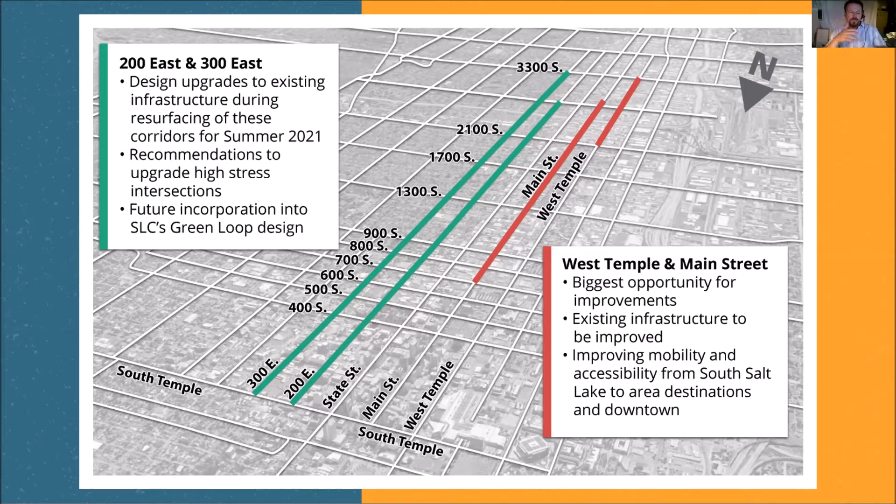That's a lot, but I think that should get us pretty well oriented geographically, and in terms of our focus for tonight, but also some context for the other corridors that are on our radar.

We wanted to start this meeting because we're in an outreach phase, trying to talk with people from the neighborhoods and communities that know these areas best. I've been doing this work a long time, but I don't live and breathe on these corridors every day and see all the nuances. So we're leaning on folks—we have a stakeholder group we've convened, with representatives from community councils, business districts, local businesses, Bees baseball, car dealerships, the SAPA group, and lots of people operating on a daily basis in the area.

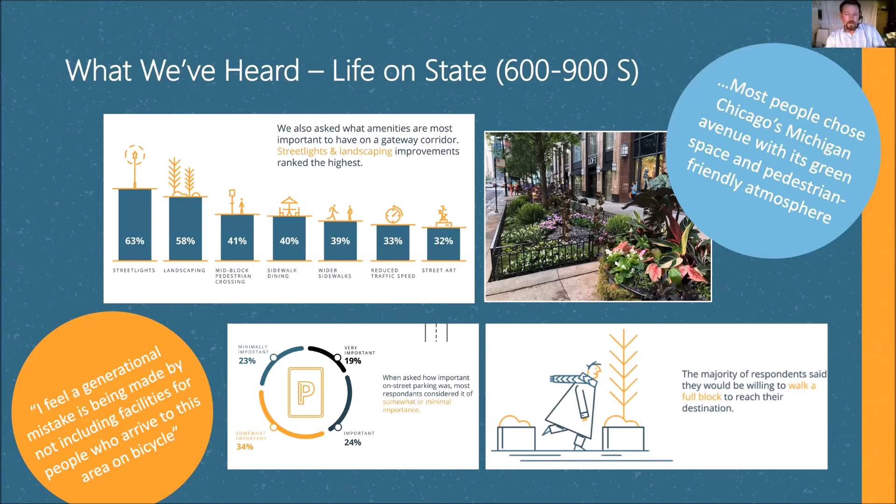This was a survey from 2018 taken specifically for State Street, in the section roughly 6th South to 9th South. This is kind of the same thing we're asking now, so we're trying to make sure we're taking that feedback into account and not asking the same questions.

But I think clearly what was said there is, look, this street is super wide given the level of traffic that's on it, and we know that based on the data - we don't need 5 lanes out there. What can we do with that space to make it a better neighborhood street, a better connection to the downtown area, to the 9th South commercial corridor.

Parking does come up, but it's not quite as hot a topic as it is on State Street. Some people were looking at 200 East as a potential candidate to absorb some of the parking loss on State Street. So we're aware of that and taking it into account.

These next two slides, I'm not going to spend a lot of time on. These are just giving a nod to another project that's going on. There's the ballpark station area plan, and this is the South Salt Lake general plan.

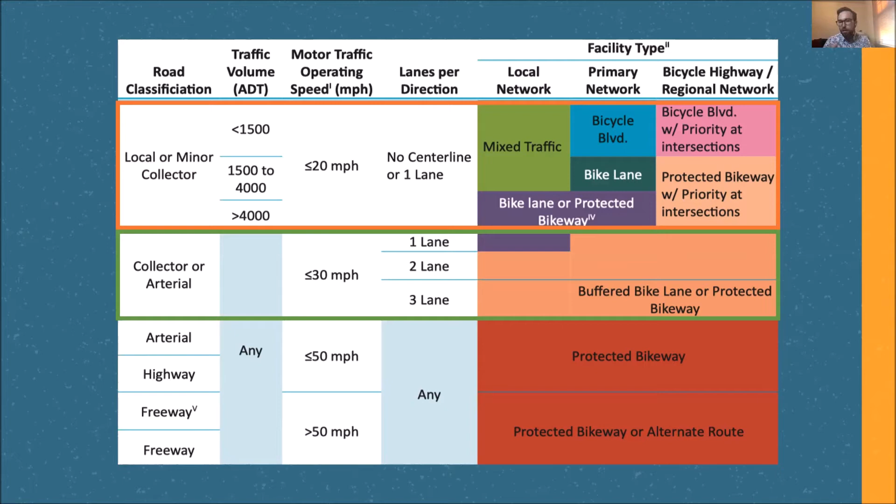Today we're really going to be focused on where that green box is. So we're a collector arterial where the speeds currently are 30 miles an hour or below, and really we're seeing that there's a good reason there that we're looking at buffered bike lanes or protected bikeways, and I'll show you some design elements and why we get there. Next slide, please.

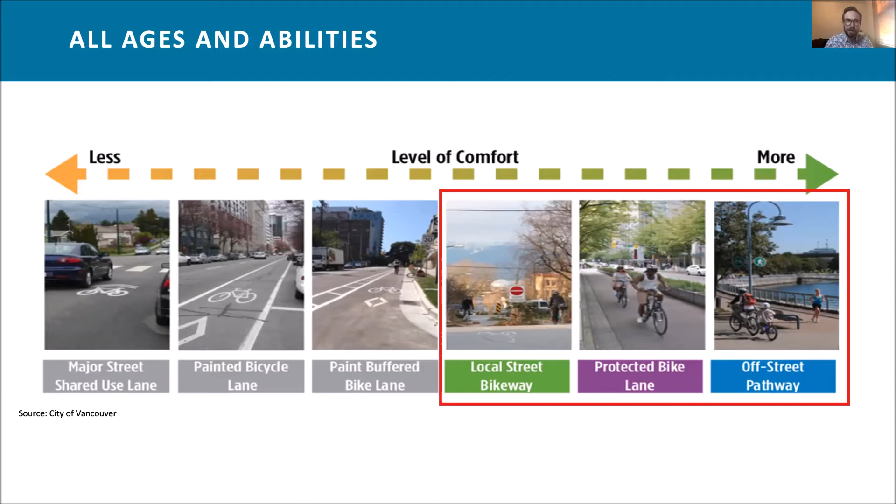So in looking at physically separated facilities, I'm going to talk you through a few of the key design features. We'll have more detailed descriptions of minimum and maximum widths when we get into the design exercise. But I'm just going to talk about some things we might want to think about as we're coming up with concepts for the corridors.

Before we get there, I want to talk about our philosophy in terms of how we organize traffic. This comes back to what anyone who's driven a car or walked through a city would understand: we want to organize traffic from the slowest on the outside, which are people walking or sitting, towards the fastest on the inside. This is the same way a highway functions, with the slowest merging happening on the outside and then towards the middle.

In an urban environment, we separate this into modes. We always want to keep pedestrians to the edges where they feel most comfortable and naturally gravitate. Then the medium speed modes, which are bikes or increasingly e-scooters or other types of medium speed mobility. And then cars, trucks, and transit in the middle.

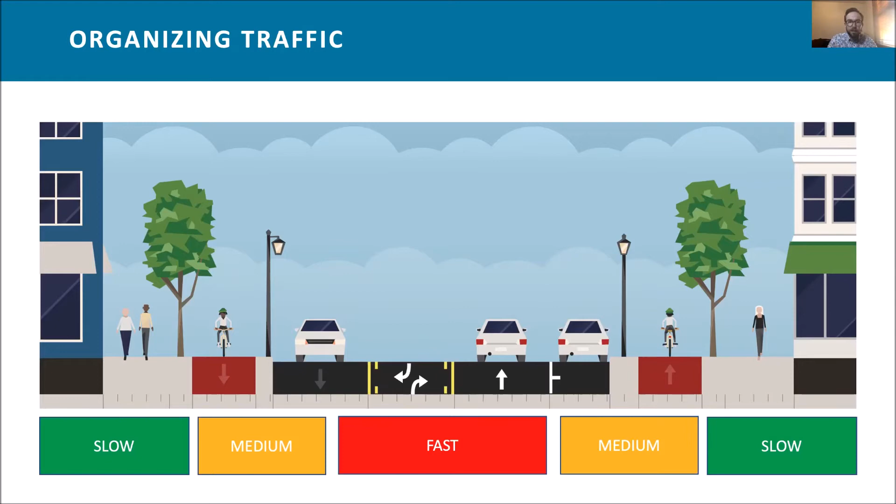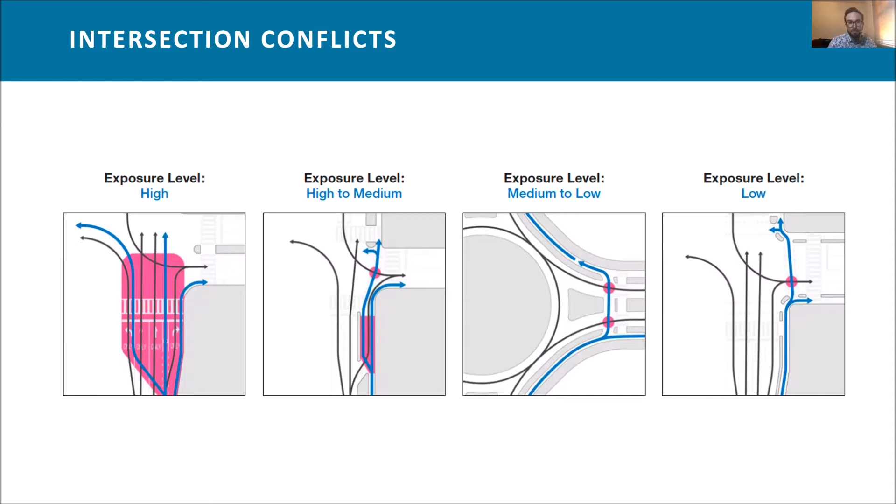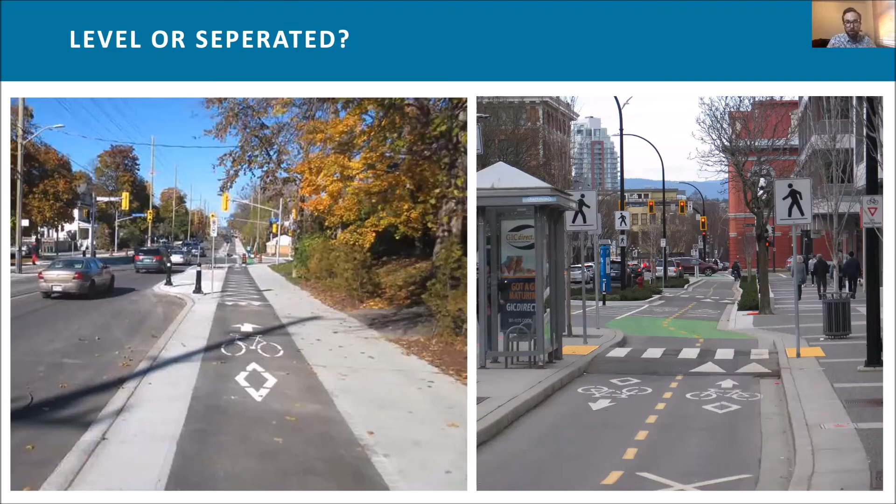Having them at the same height is helpful in the winter for clearing snow. On the right, having them separated can be helpful for those with visual impairments, for cane detection, or in areas with high pedestrian or bike volumes, just to keep users a little bit separated. So these are some things we'll want to consider moving forward.

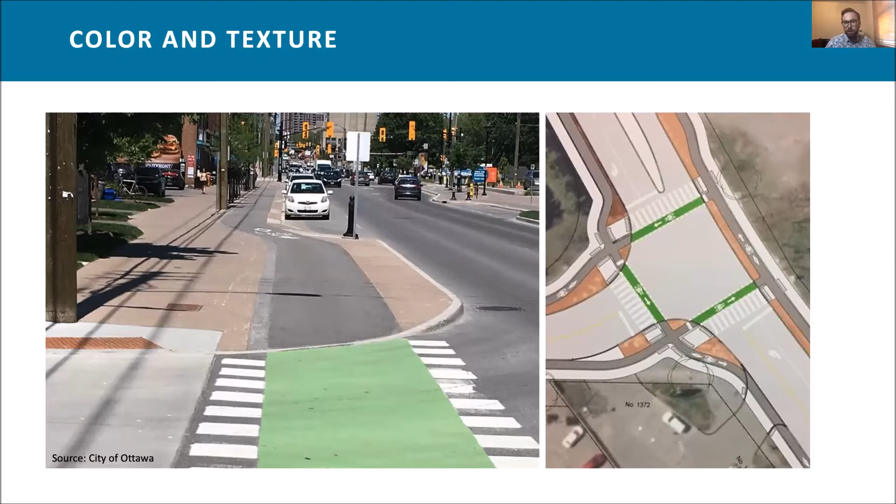Transit functionality is obviously important. Pedestrians and transit go well together, and so do bikes and transit. As we move to protected cycle tracks, how bikes, pedestrians, and transit stops interact is an important thing to think about. So we can see here that the cycle track is lower than the sidewalk, and where it connects to the transit stop, it's raised with a level crosswalk there.

There are several features we can use to improve the quality of these connections. But the important thing is that conflicts between bikes and pedestrians are often well managed, whereas a conflict between a cyclist and a bus is much more dangerous. So we're trying to improve the situation overall and the experience for everyone.

So green is good. Getting back to the placemaking—a lot of mobility and transportation projects can become very focused on the transportation lens and forget about just creating large, impermeable, hard surfaces, which can be hot and have lots of impact. So we're going to try to take as many opportunities as we can to integrate green, nice spaces to add some extra natural vibrancy back to the streets.

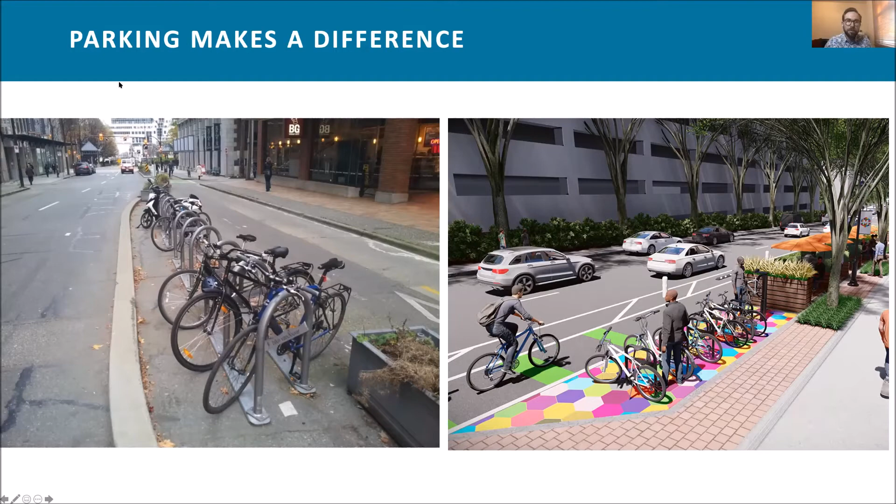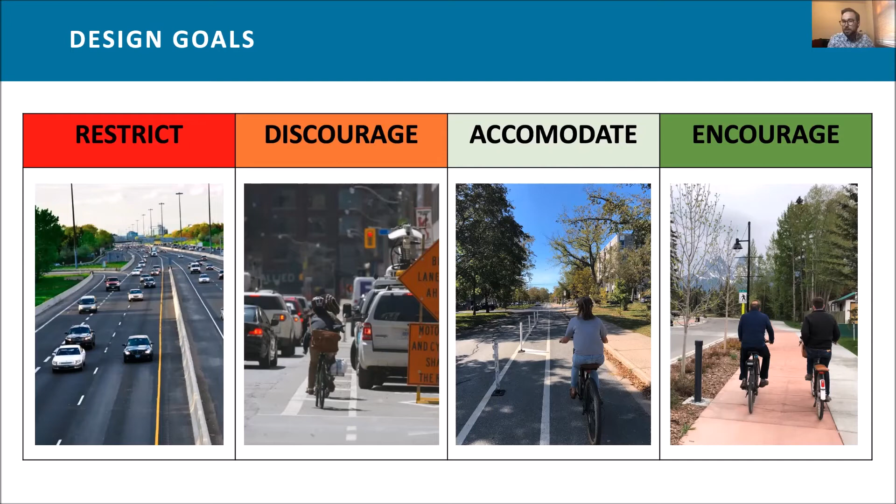Thanks, Justin. In a few minutes, we are going to be jumping into our breakout rooms, and we're going to be using a tool called Concept Board to guide us through the activities. It's basically a digital whiteboard. If we were in person, it would be our flip charts that we'd be scribbling notes all over and adding sticky notes to left, right, and center.

So this is going to be our opportunity to really get a lot of feedback from you all. Now, what we've done for the first activity is broken the corridor up into different context zones, thinking about the land use in the area, what people are doing there, and then how we want everyone to give feedback on what the street should look like.

We've developed, or it's become clear, that there are 5 different context zones along this corridor, these 2 corridors. I want you all to pay close attention to these 5, because in a minute we're going to ask you which context zone you're most excited about contributing to and offering feedback on. This will all be public afterwards, so you can add your feedback to all of the zones, as many as you like, but for now we need you in one of the groups.

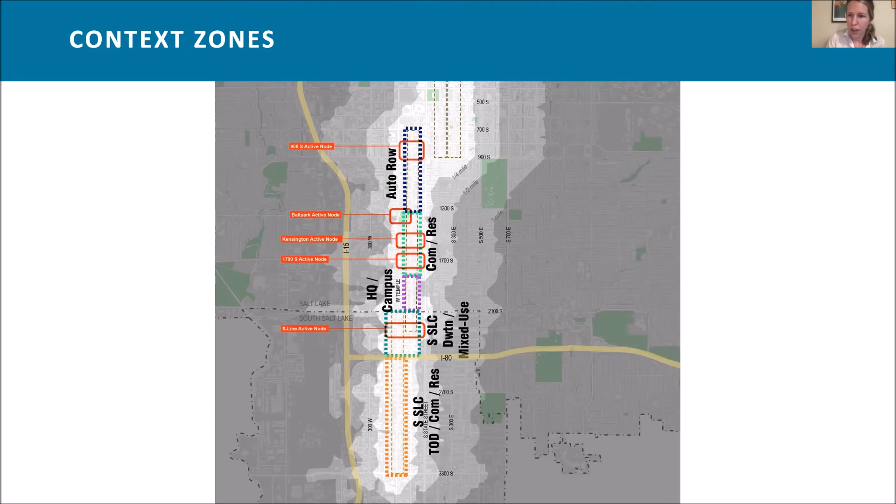So when we get into concept board, it's going to be in 5 columns, and we'll give everyone a minute to orient themselves. Each column represents one of the context zones, so we can focus on those columns.

This is the example that the stakeholders have contributed to. We've got a clean slate for you guys, but you should also have access to what the stakeholders have done, so you can see their comments as well. On the next slide, if we zoom in, this will give you a sense of what it looks like once we're in there, with plenty of opportunity to leave comments and ask questions and make notes.

When we get into the breakout rooms, we'll have a minute to orient ourselves. There'll be one facilitator operating the screen, so you can follow along. You don't have to feel obligated to put sticky notes, we can help you do that. Are there any questions on the concept board for the time being? If you have questions, you can pop them into the chat. Then the second activity, we're going to stay in our breakout rooms.

We'll use Streetmix to take the way we've defined the context zones and translate that into a concept design.

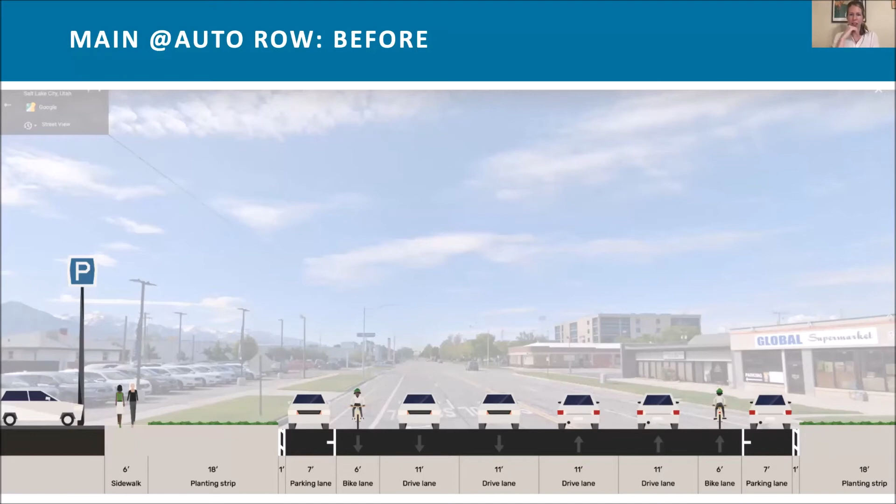Jenny, on the next slide. So this is Auto Row, that first context zone we were talking about, the before, and then on the after, on the next slide, you can see a nice addition of street trees, expansion of sidewalk space, and really a narrowing of the road.

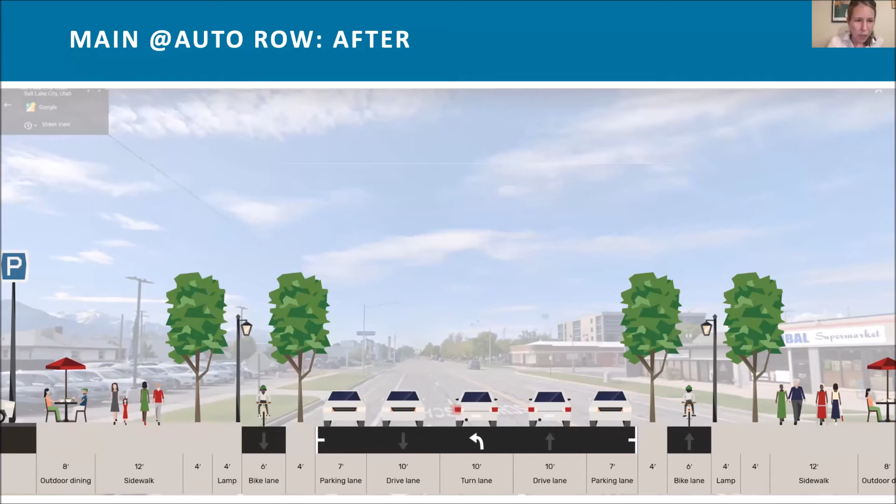We'll do one more before and after here, still on Main Street. Here's our before, plenty of space on the road. And on our after, we can see a very different way of thinking about this street, again using trees as vertical elements and really flipping the amount of space dedicated to cars and pedestrians, so it's much more pedestrian and cyclist oriented space.

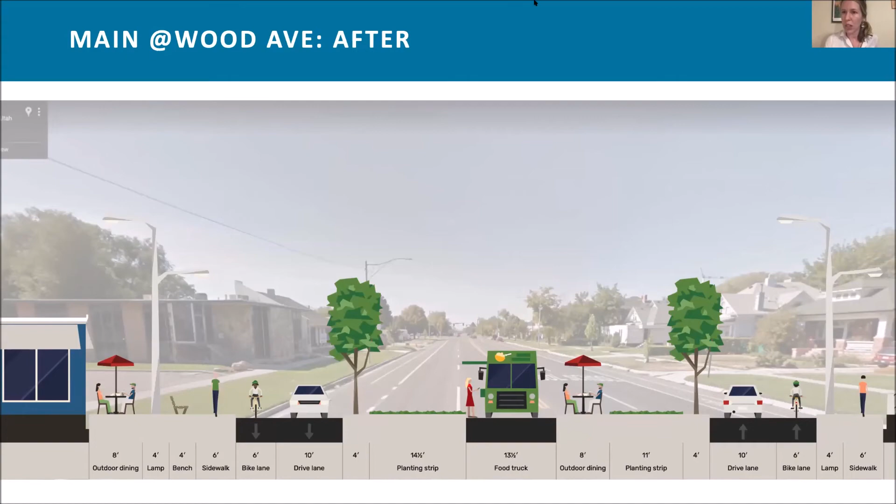Each of your concept boards has these examples on them, so you can still see them, and we are going to have Jenny send us into those rooms in just a minute here. Jenny, if you could bring us back at 7:15 so we can have a few minutes to share and report back, that would be great.

And I will, why don't I share my screen with you all so we can take a quick look at the concept board. Jenny, am I allowed to share my screen? Yes, okay.

All right, so if everyone can see this, this is what it's going to look like when we pop in, and let's pretend we are in context zone 3. You can zoom with either your mouse or your trackpad, there's also a zoom function down here. And then if you need to move your page around when we share this link with you, you just grab it with your grabby hand and shift it around that way.

And then if you want to make comments or additions, you can do that up here. My favorite function is the little post-it note, just do a little posty like that and type away. When we get into the rooms, we'll have a minute to mess around with that, but just wanted to give you a quick orientation on the taskbar and the zoom function.

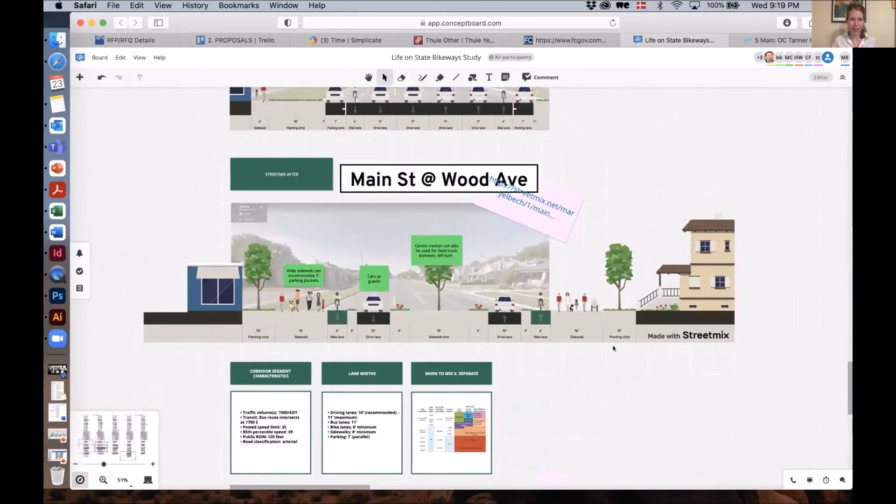Well, I've been designated to lead this. I think I'll skip over 1 and 2 since that's pretty self-explanatory. We really wanted to focus on a few notes here in section 4, where we need to, for one, complete the 13th South bike bypass.

There needs to be better intersections at both 13th South and Main and 17th South and Main, and also a better intersection at the Kensington byway system. And the street needs to be designed so that it lowers speeds.

We also wanted to highlight that the Parley's Trail segment needs to be completed around Central Pointe Station and all the way out to the Jordan River. In our cross sections, we were blown away by how wide the street is. We decided not to have regular on-street parking, but pockets of on-street parking on the right side of the street, or in the center median. There's an opportunity for a very wide center median that could be used for a lot of different things. I think that covers most of the main points.

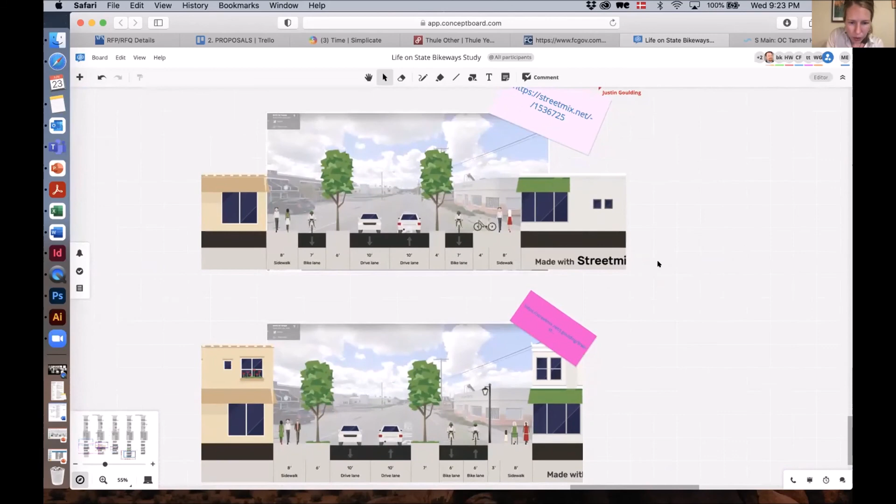Okay, here we are. Oh man, y'all worked through multiple options. Okay Justin, who's speaking from y'all's group? Brian, do you want to talk, or would you like me to go over it? You can go. No, I don't have control of this. There we go, I guess I can.

Unlike the other sections, our right of way was not as generous, so it's a bit more of a constrained situation. This is kind of a plan downtown for South Salt Lake, so there's a lot of change happening. We had some discussion about the now versus later and how that's going to shift. We noticed and had a few comments about really making sure that the integration between the S-line connection, between Main and West Temple, is well accommodated, and that there's a smooth transition between the facilities on West Temple and the S-line.

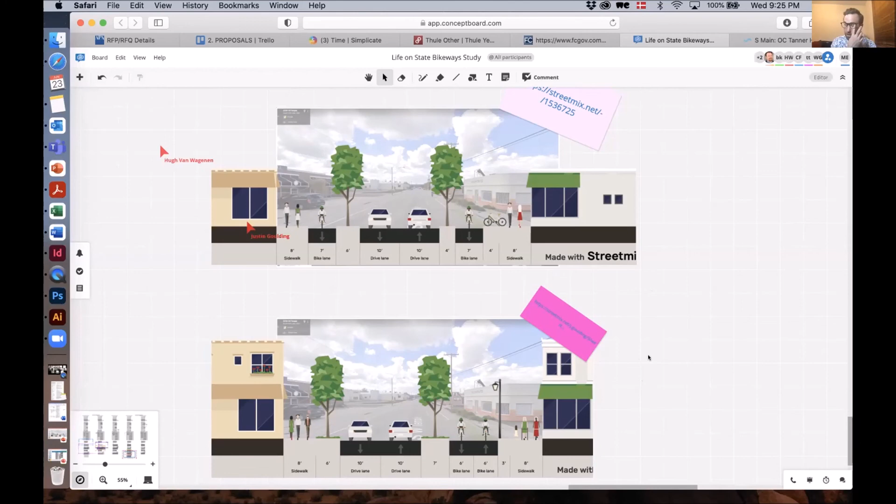When we got down into the design, the one shown above is actually from the previous workshop, so we can ignore that and look at the one at the bottom. In this case we went with a bidirectional facility, as we felt it was more comfortable for a wider range of users, and also provided a more consistent approach or connection with the S-line coming from that multi-use trail crossing. Fairly narrow or standard traffic lanes, and introducing some greenery with trees to provide shade and soften up the overall corridor.

Anything to add, Brian? Nope, you got it. Yeah, we had some lighting. Yeah, we had a buffer. Yes. Great, thanks y'all.

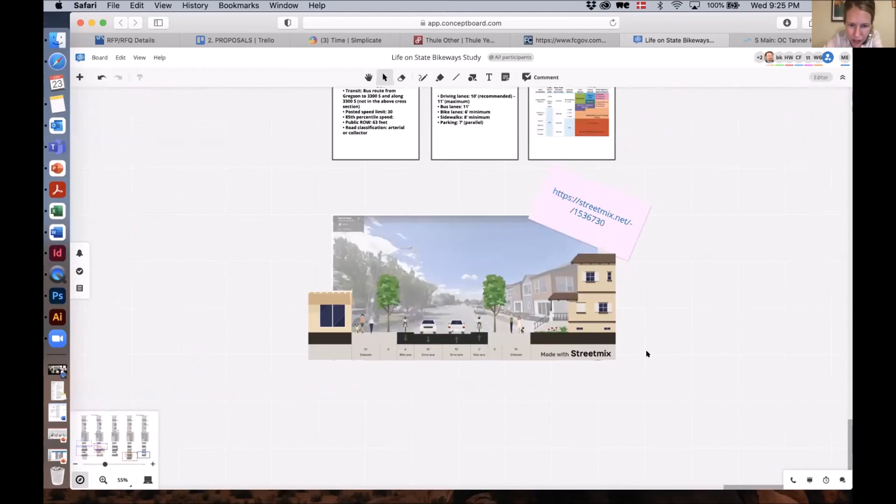Okay Maria, your group, what did y'all come up with? Well, we didn't actually get to this exercise as George had to take off early. I think the messages we heard from George were more along the lines of concern about maintaining the bike facilities that we do have, making sure debris is removed, making sure we keep the focus on important facilities like the Parley's Trail and that we don't lose momentum on projects like that. There's still some concern that there should be bikes on State Street, which I don't know that anybody here necessarily disagrees with, but we are where we are.

Kyle, anything you want to add to that? Just reiterating that the Parley's Trail connection between Main and the Jordan River is important, and while we're looking at improvements to existing painted on-street bike facilities, that's a great example of one that has a better future than it is today. So we don't want to lose sight of that, and we've heard it in a couple different places, so we appreciate that comment.

There's also a notion that Main Street in South Salt Lake deserves maybe more of a place in the bike network than it currently does or is currently planned for. So that was an interesting point, and something we'll have to think about more. I think particularly between 21st South and the S-line, that makes a lot of sense. Going south from there, I don't know.

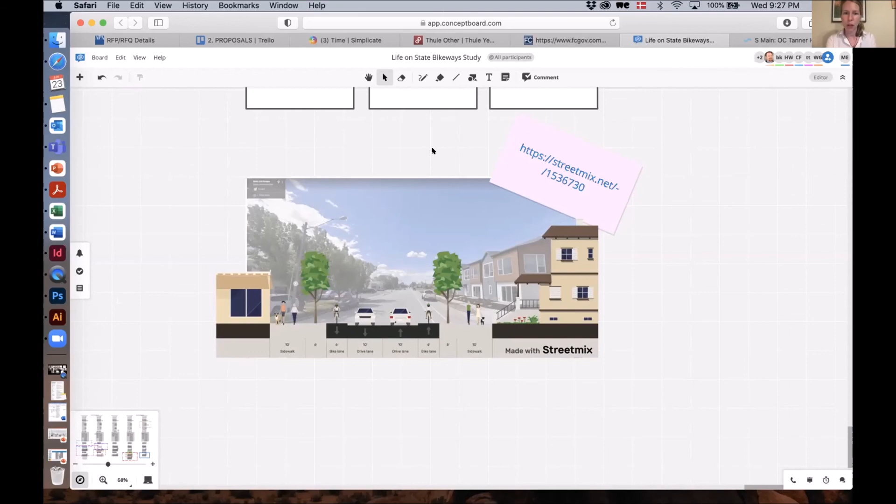Thanks, Mary, and thank you to Mobycon and CGF folks for helping put all this together. So where does this go? This is our opportunity to get some sense of where people, members of the public, stakeholders, think we need to be adapting the design of these corridors to reflect the communities around them and people's priorities.

With these cross sections, the first thing we're probably going to do is post this online to try to get more feedback from members of the public, so we can hopefully get more engagement. But what we'd like to do is develop some prototypes for each of these corridor segments or context zones, reflecting what we've heard from you and from stakeholders, so we can take a look at what these cross sections should be.

Then we'll start to have some reality checks around what we can build, what the costs are for the kinds of facilities we're trying to build, and work out ideas to bring back to the public, probably early fall. We'll be condensing everything we heard from you all and providing a summary that'll be on the website sometime in the next few weeks, I'd guess.

And we are going to continue to have some pop-up events throughout the community. The first one we have on schedule is the Slug Brewstillery event, mid-July, but we're planning on being there. Anyway, we'll be there to answer questions.